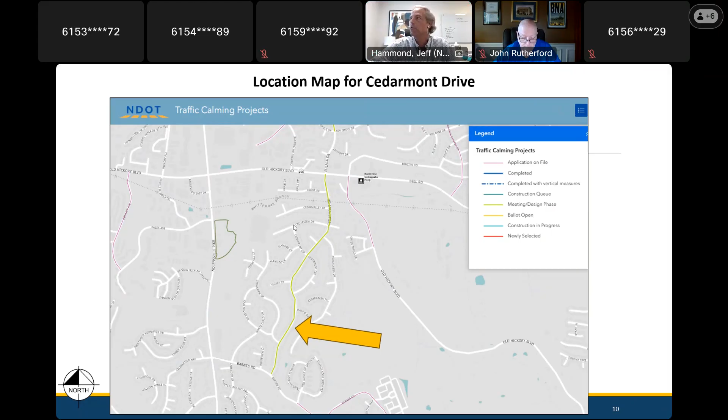All right, I'm going to talk about the tools we have at our disposal in this program. We'll start with this one, which is really the bread and butter—I've already mentioned it a couple of times. Speed cushion—you've probably seen these. They're becoming more and more common in neighborhoods for traffic calming.

It is a fabricated, very high density rubber device that is purchased. And I say that because everyone that comes off the line is the same. We like that consistency. We think it's also good for neighbors because they know what they're getting. You can go drive these in other places, and how it feels to you on one street will be pretty much how it feels on your street.

You see different configurations—sometimes it's 2 side by side, sometimes 3. I think we've got streets where we've gone up to 5 wide just because the street is so wide. The only difference there is we're trying to make sure someone cannot drive around them. That's the one stipulation—if we give people too much room, even if that means sometimes they leave the side of the road, they will do it. They will try to drive around these. So we work really hard with our design to make sure that's not possible. I think your street is curbed on both sides, so it's not as likely someone is going to do that.

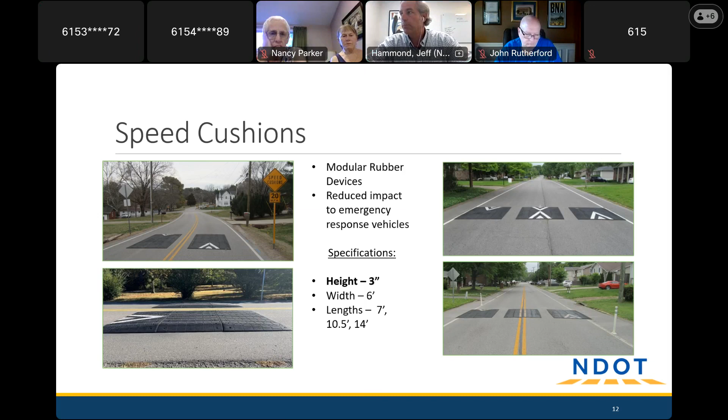The shorter ones are 7 feet long in the direction of travel. We try to reserve those for some of our more urban streets—the shorter they are, the more appropriate for urban areas where maybe closer to a 30-mile-an-hour speed is appropriate. Our default, where we've settled for most neighborhoods—and I'd put yours in this category—is the 10.5-foot cushions. You guys are kind of a suburban context, so we think that would give us the best result.

The next tool is really a close cousin to the speed cushion: the speed table, made by the same firm, feels the same way.

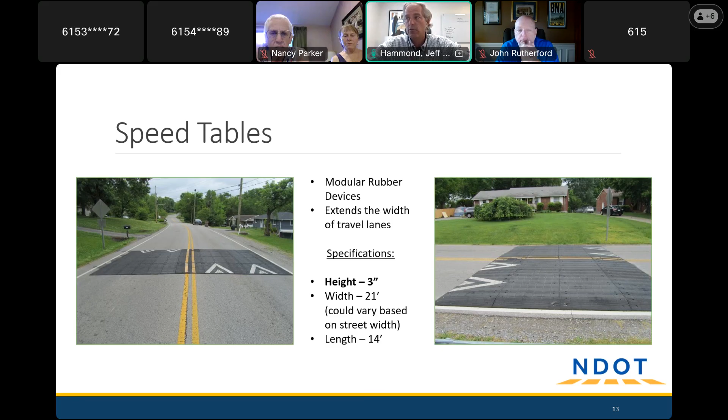It's just obviously a little bit of a different configuration. That is, it goes all the way across the road and does not have those breaks in it. So we're not using these nearly as much because of the emergency response situation. Probably especially on a street with as high traffic volume as yours, we would be very cautious about using something like this. But occasionally they do have their place. You're seeing them in parks, some places, where that emergency response is not quite as critical.

We do have some before and after data. I'm really cautious about using this because I always say that every street's a little bit different. Every street is starting at a different speed, and so how much decrease in speed we might see varies pretty greatly. But I think it's pretty safe to say, if we're seeing on average 9 to 11 mile an hour decreases, that's not surprising. So they're having a pretty good impact.

And one thing about this is that impact tends to last, unlike probably some of the other tools that we have, where you may get a very good initial impact, but over time, people might get used to it or different things, and we see that impact wane. Here, we don't see that as much.

One of those tools may be the feedback sign. This is a different tool that we can use. This is a tool that is more for information. And so some people swear by them and say it has worked wonders in our neighborhood. We love them. Other people say it worked great at first, and I'm not so sure anymore because people have gotten used to it.

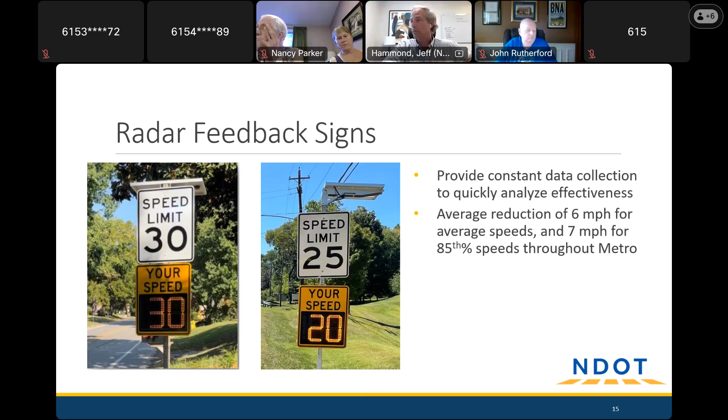So it certainly has its place. We will often supplement a speed cushion project with something like this. If we have a big hill or sharp curves, or for some other reason speed cushions don't work as well, we will sometimes use a feedback sign to kind of bridge the gap there, but it can certainly be a helpful tool.

Sometimes we will narrow a street. We know that if a street looks very wide visually, as yours does, it is a wide street. Sometimes we can introduce pavement markings, edge lines mostly, to visually narrow those, and sometimes that will bring about a slower speed. So that's a tool that we have as well.

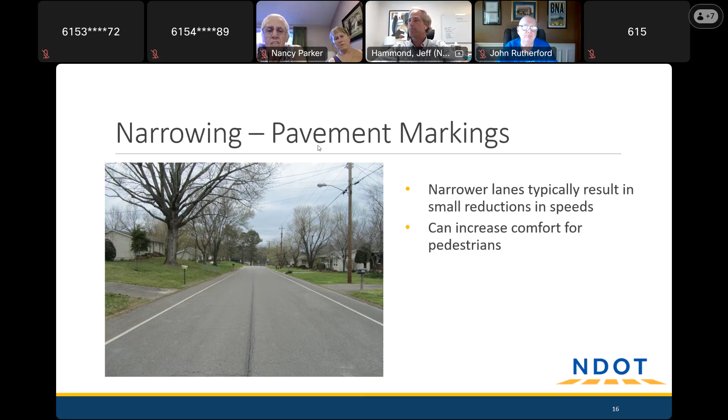A little bit more of an advanced topic in pavement markings would be at intersections. We can do something like bulb outs, where we shorten the radius of some very large radius curves. If we've got people that turn onto the street or off of the street at a very high rate of speed, sometimes if we can visually or physically shrink that down a little bit, some people will slow down.

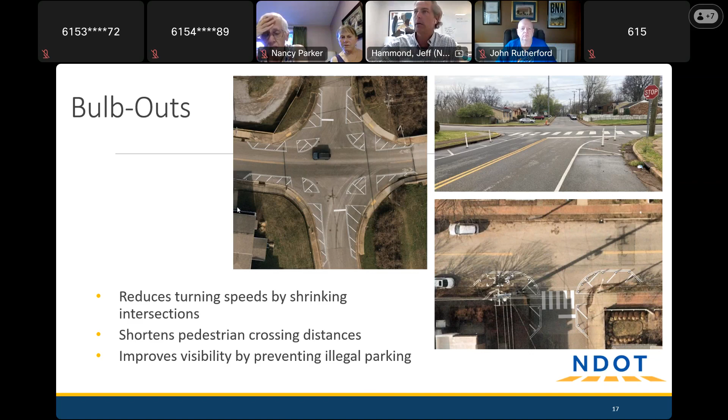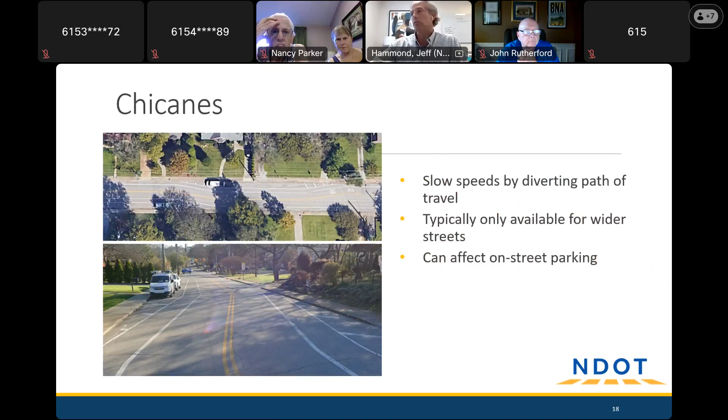And then lastly, the traffic circle, good for an intersection, but again, with a big asterisk beside it, which is things like school buses can have a really tough time with these. And so we're really careful, and the conditions need to be just right. It also takes an awful lot of pavement for these to be a good solution.

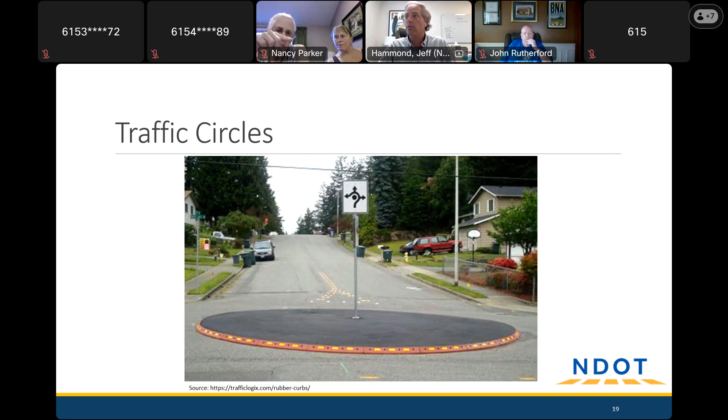But I'm going to talk more about that traffic circle in just a second. And so here is, and I apologize if you're just calling in, all of that stuff is probably just information. This is where it would be great if you can see it, but I will describe what we're looking at here, and then hopefully you'll have an opportunity to maybe look at the recording, or we can get you this image.

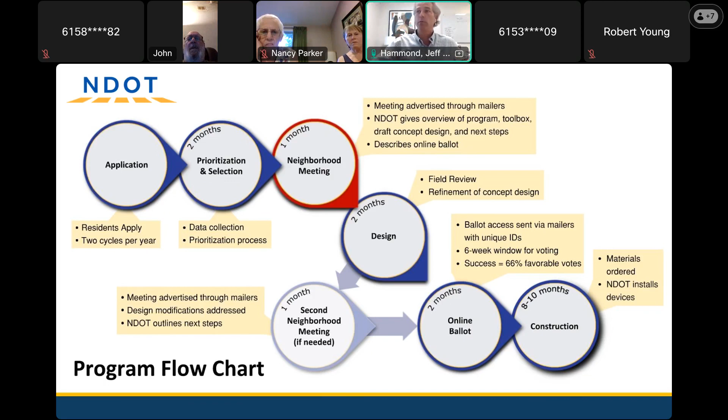But let me talk about this ballot process, because that is the formal way. If anyone is opposed, the best way we've come up with - because we know that this type of a solution is not for everybody, and not everybody often feels exactly the same way - the best way we know to make a decision like this is to put it back into the hands of the neighborhood. So we came up with this ballot process that every street that has speed cushions had to go through. So if you go on a street that's got cushions, it's because they voted for it - people wanted it.

And at the end of 6 weeks, we take up all of those results, and if 2/3 of the people have voted in favor of it, we'll do the project. That's the process. It doesn't matter how many people vote - it only matters that 2/3 of the people that did vote have to be in favor of it.

The people that - go ahead, it sounded like a question was about to be asked. Yeah, this is Nancy Parker again. I got one because I have frontage on Cedarmont, but I know none of my neighbors that live on Cedar Creek, understandably, got the notice.

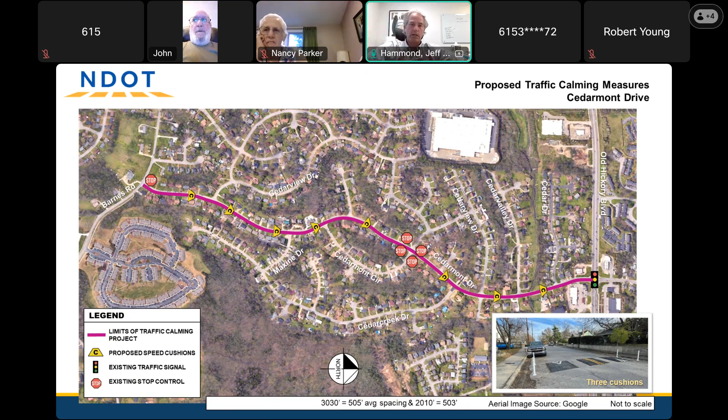Well, wonderful. Thank you all again for taking the time this evening and for applying into the process. Hopefully we'll come up with something that will be a nice benefit. I'm a resident of Davidson County. This is really a nice service, sometimes it's not a critical issue, we kind of leave it as discretionary, but at least you have the option to pick it up and get a project done if you want. Any final things as we close out here?